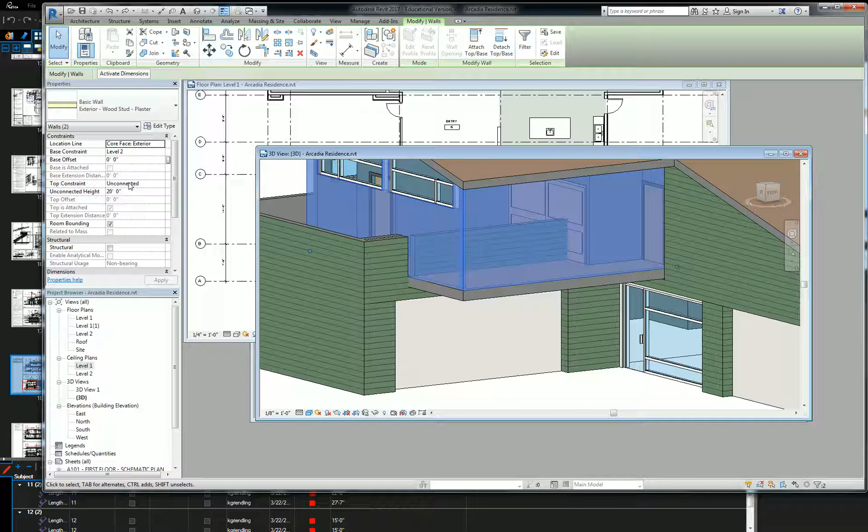So these two walls here are actually going to jump or drop down 2 feet. We don't really have to do much because the wall's upper boundary is limited to the roof, so it's always going to touch that roof. So all I have to do is set the base offset to -2 feet. That drops it down to there.

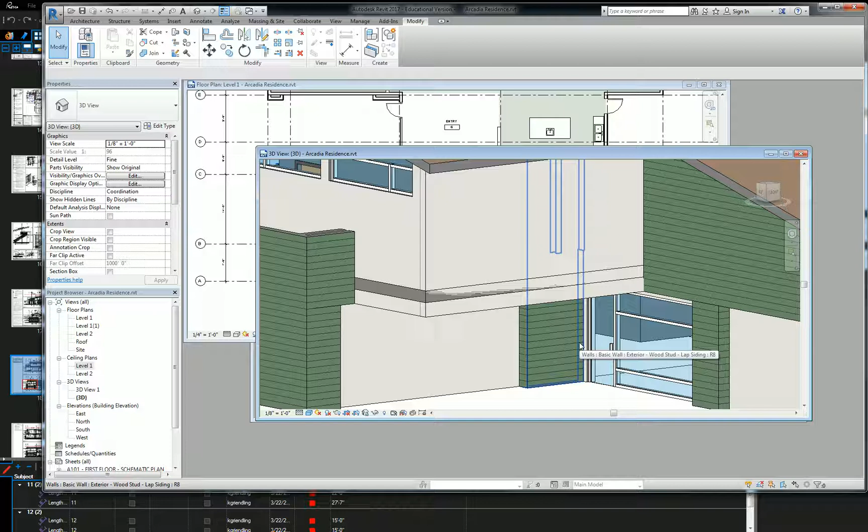But we still have the problem of the floor plate, and that's why we have to shift it into place. So when you look at it in section, let me just cut a real quick section.

Let's put it on fine.

This is the issue we're having, right? The floor plate goes all the way out, and our finish is aligned with that floor plate. So all you have to do is align your plywood.

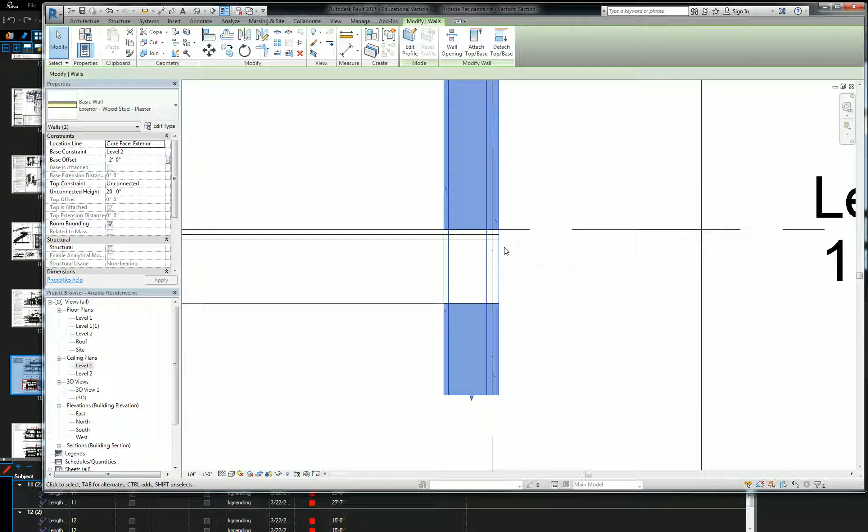Oh, it didn't move out. That's weird. Let's just move it then. Move your plywood out. So, oh, and look at that. The floor went with it.

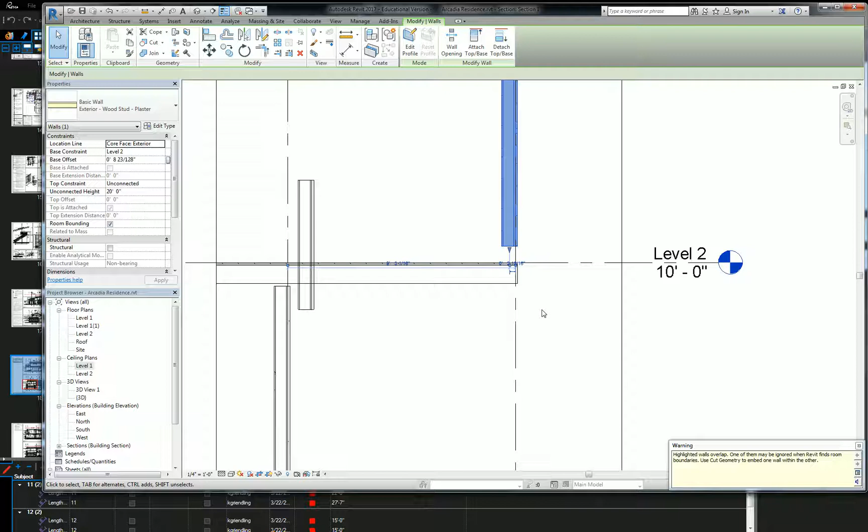Hang on, these get a little funky. So if it's going to get sticky like that, if you accidentally use the align tool or something and associate that element with the edge of the floor, which I guess happened here, most of the time you can kind of just pull it up like this. That's what I sometimes do to try and troubleshoot that.

Oh, I see what the issue is. The floor plate—so the wall is in the correct position with the finish on the outside—the floor plate should be pulled back to the structural grid. So let's go back into the second floor and edit it there.

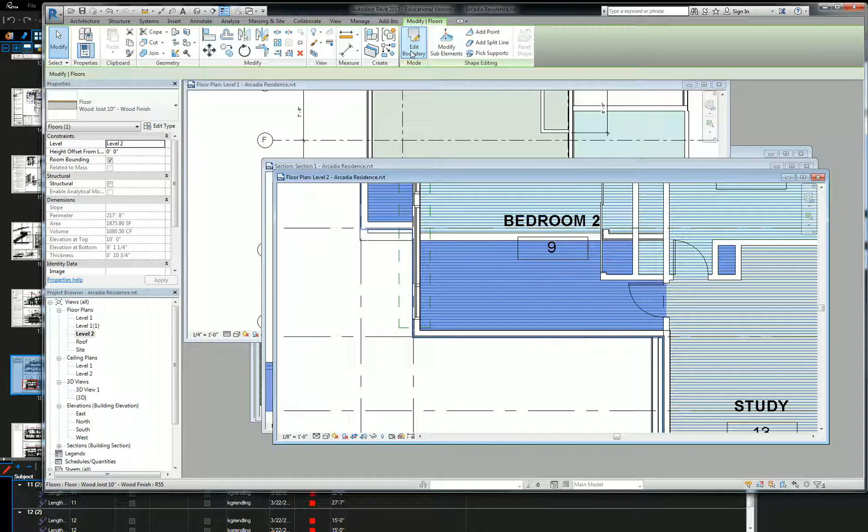Edit boundary, and you can easily see the issue right here. Because these lines are on the exterior of the wall and not aligned to the plywood, you can just move it back like that, and then you probably want to verify that that's also the case elsewhere.

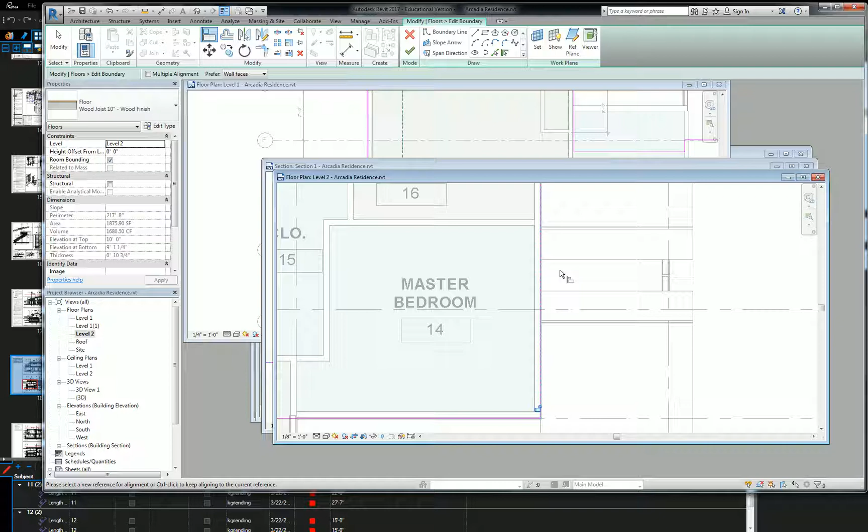So this is an issue on this side as well. I'll pull that one back. Also back here. And back here as well. This one, yeah, this needs to move back too. Looks like it's pretty much everywhere. So I'll align this one to the grid.

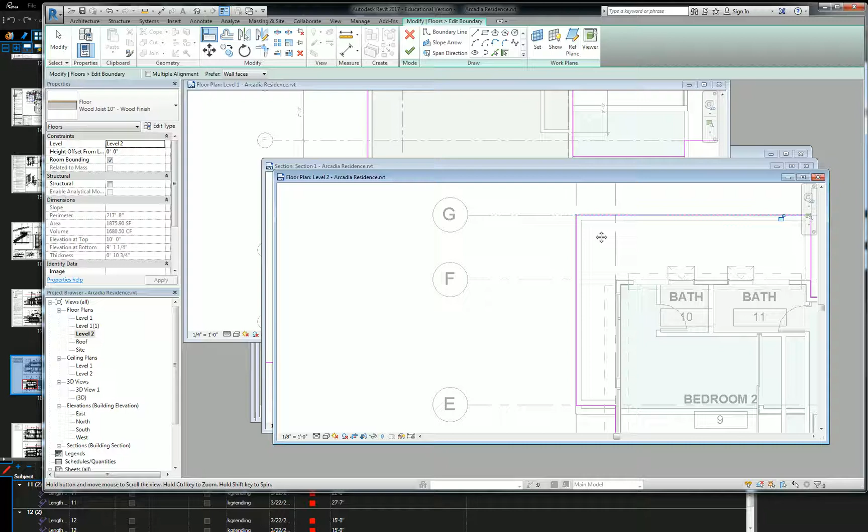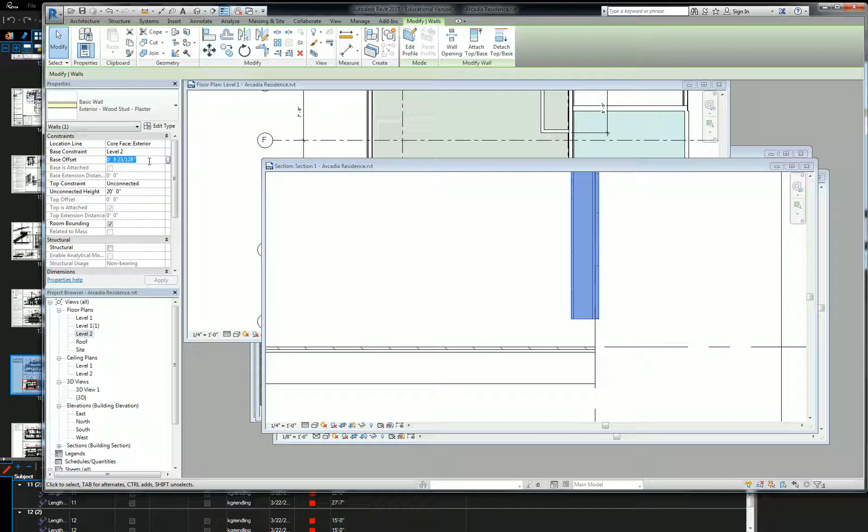My best guess is that happened when I changed my wall type, because when I drew my walls originally, I drew it right on the grid line, so it associated that with the grid line at the exterior of the wall, and I guess the floor just moved with it. So hit check, say no, because you always want to control those yourself. Let's change this to -2 again, and then when you go back into 3D, it'll look like that. And that's what we have here.

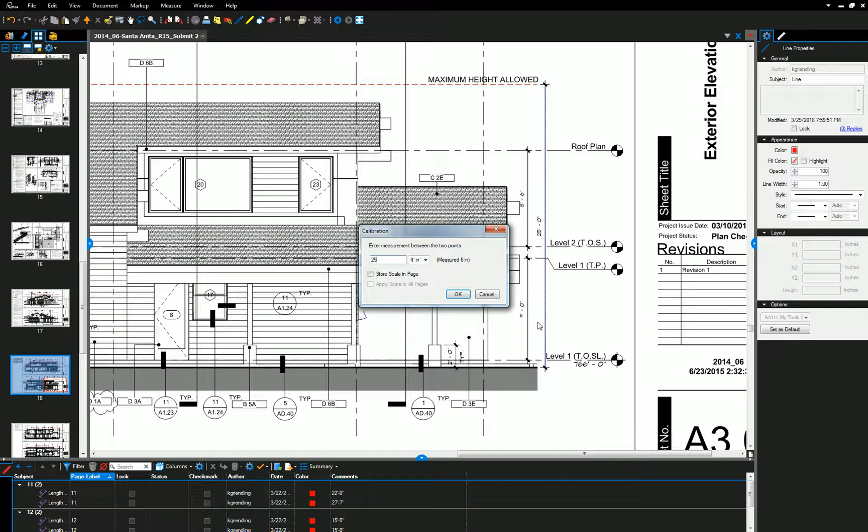Looks like the garage door isn't quite the right height. Let me check that height real quick. Let's go to measure, calibrate. I'm going to set this to 25 here. So I currently have all of my openings going to 8 feet. So that's only 7'7". So yeah, all right, I got to make some adjustments.

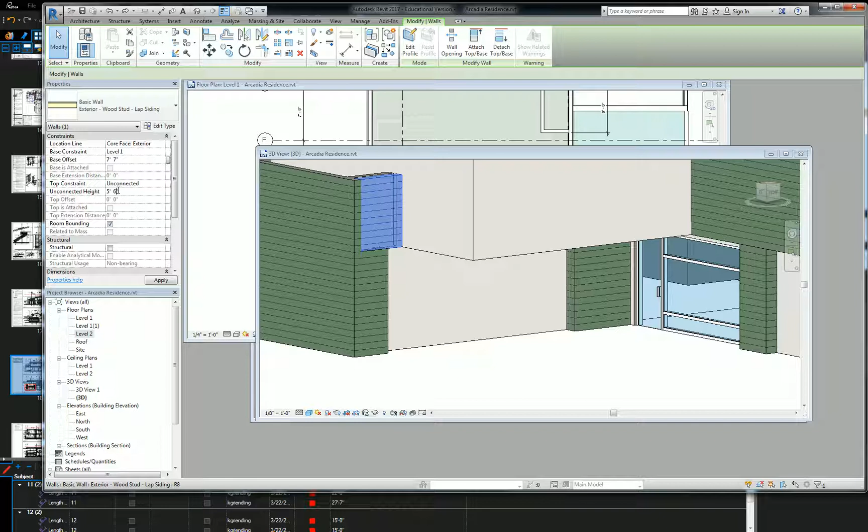This needs to come down 5 inches. Wait, what did I do wrong there? That's an unconnected height, can stay. This needs to be 7'7", and then I need to add 5 inches to the height here so that it accommodates.